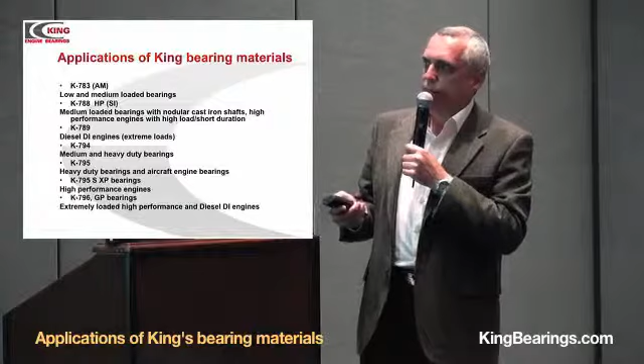Compression ratio: the higher the compression ratio, the higher the pressure, and the higher the load applied to the bearing. Octane number and fuel type: different fuels with different octane numbers allow different levels of compression ratio. For example, methanol has a maximum 16 compression ratio, different from compression ratio 10 - the pressure is high and the load to the bearing is higher.

Displacement per cylinder, engine type - different effects of diesel engine versus gasoline engine. Aspiration type: turbocharged or supercharged engines intake more air, so you can intake more fuel, so the energy discharged in the cylinder is higher and the load applied to the bearing is higher. Bore diameter: the higher the bore diameter, the higher the load, because load is a result of the pressure and the area.

Also, rotation speed of the piston and connecting rod and their weights determine the inertial forces, and so they affect the bearing loading. And bearing dimensions: if you have a large diameter and long bearing, the specific load applied to this bearing is low.

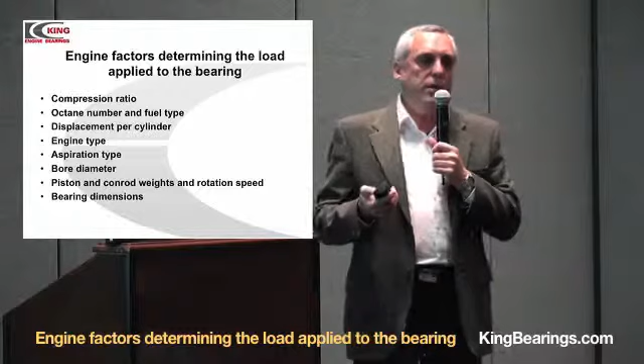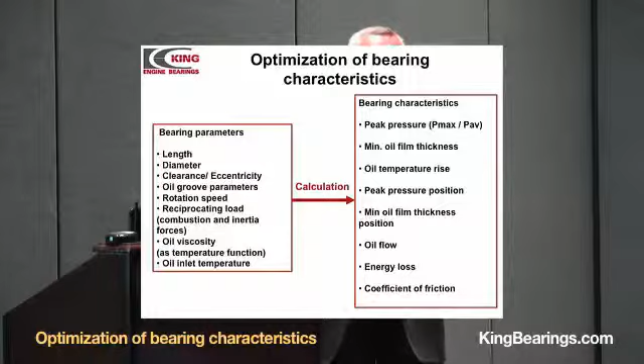We are using our developed software which is able to theoretically calculate the load applied to the bearings. If we have input parameters like this, and engine bearing parameters, we can calculate the combustion pressure, the inertial forces, and the load applied to the bearing. So we can optimize the bearing parameters and select the proper bearing materials using this software.

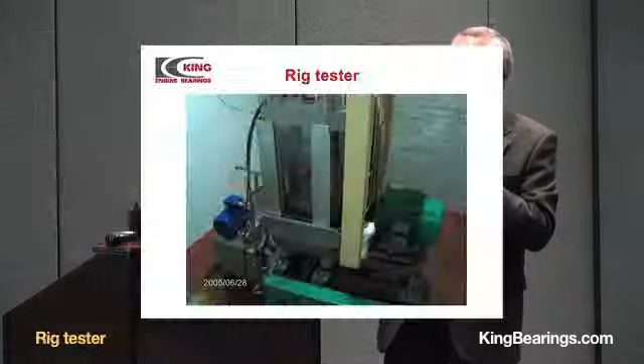This is our test rig machine that we are using for testing our new materials and our currently produced materials. This machine simulates the conditions in real engines. It means cycle loading, but the loading is controlled, so we can predetermine conditions of the test.

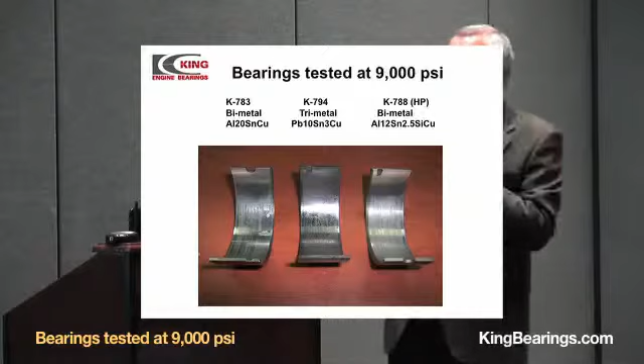These are the results of testing. You see different types of materials. For example, this material shows fatigue on this area. You also see fatigue cracks on the overlay of the trimetal material. And you see this bearing with no fatigue signs.

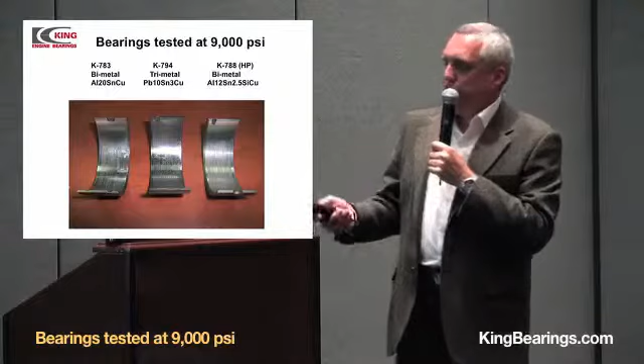This is another example, fatigue on the aluminum surface. And these are two bearings made of high-strength aluminum. They were tested at very high load, but there is no fatigue. This bearing was tested with contaminated oil - you see the particles embedded in the aluminum surface.

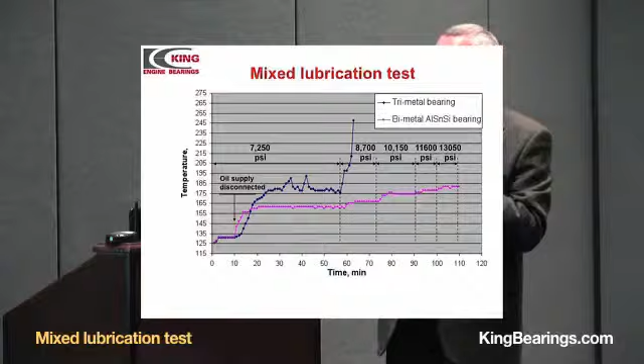This is a very interesting test, also made in this machine, the test rig. Two different materials were tested at mixed lubrication conditions. And you see here the temperature versus time - the temperature of the bearing back.

For example, this material, this is trimetal material. When the oil was disconnected and the regime of mixed lubrication started at this point, the bearing back temperature increases. It stabilized at about 180 Fahrenheit with some peaks which indicate pre-seizure conditions. But when the load was increased, immediately seizure occurs and the bearing was stuck in the machine.

The totally different behavior was with the aluminum silicon bearing, which is our HP bearing. Every increase of load results in a small increase of temperature, but no seizure occurs.

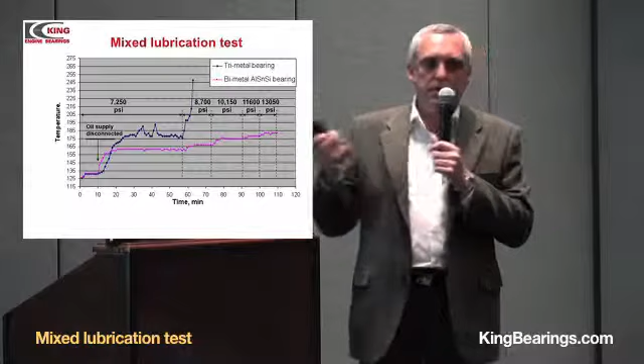This is the effect of silicon particles that I told before. The silicon polishes the surface of the journal and prevents seizure. This is a very interesting effect.

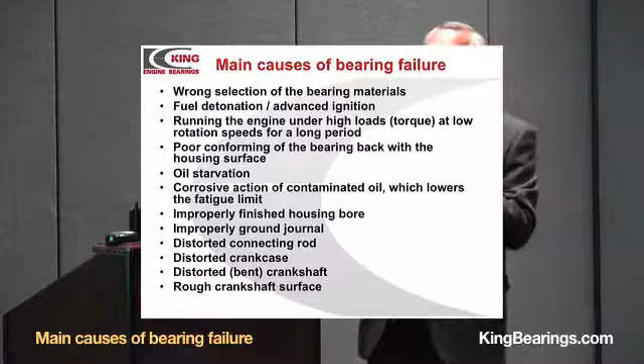Now, the main causes of bearing failure: first, wrong selection of bearing materials, or fuel detonation or advanced ignitions, which causes increased pressure in the cylinder. Running the engine under high loads at low speeds, this is a climbing regime—when the car is climbing, the torque is high and the speed is low. This is a very bad condition for bearing materials because the load is maximum.

Poor conforming of bearing back with housing surface, oil starvation, corrosion, improper finishing of housing bore or improperly ground journal, and different types of geometric defects.

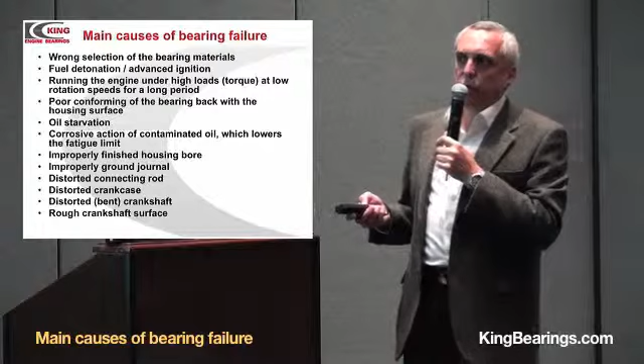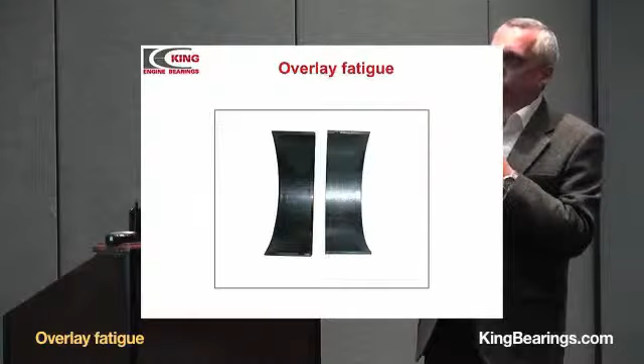These are examples of bearing failures. You see fatigue on the overlay, the small cracks on the overlay. By the way, fatigue of the overlay is not so bad as it's seen. This process is not catastrophic. If there are some cracks on the overlay, the bearing may continue to work, and may continue to work pretty good time. It is different from the fatigue of lining, aluminum lining or copper-based intermediate.

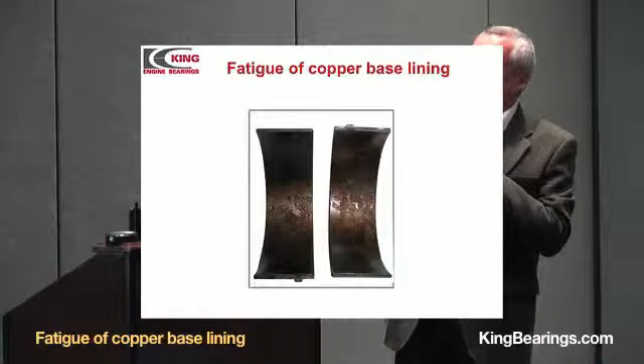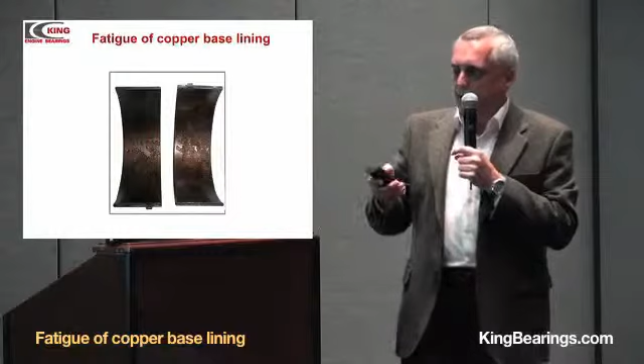If there is fatigue of copper-based like this, it looks like cratering on the surface. You see craters where particles of the copper-based intermediate are delaminated from the surface. It is very bad. It is catastrophic failure.

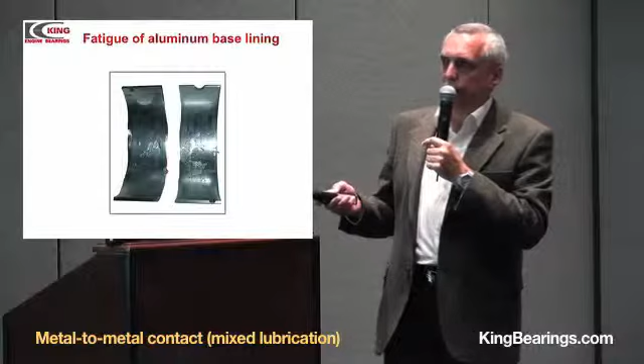Here you can see the metal-to-metal contact, mixed lubrication, or maybe even boundary lubrication. This is the initial stage of boundary lubrication, and this is the final stage. Here, overlay is gone, copper is gone, and steel is burned. So it's a very bad failure.

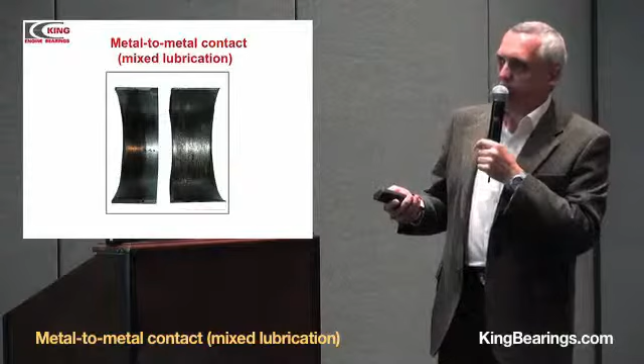The end of a twisted connecting rod, the load applied in a specific area, an edge area, for example, all the load. So because all the load is applied to this area, the specific load is high, and you see here the cracks of fatigue.

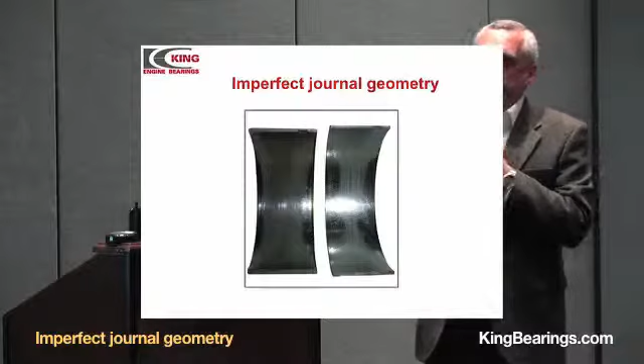And imperfect journal geometry. This case is hourglass grinding of the journal, so you see edge loading from both sides.

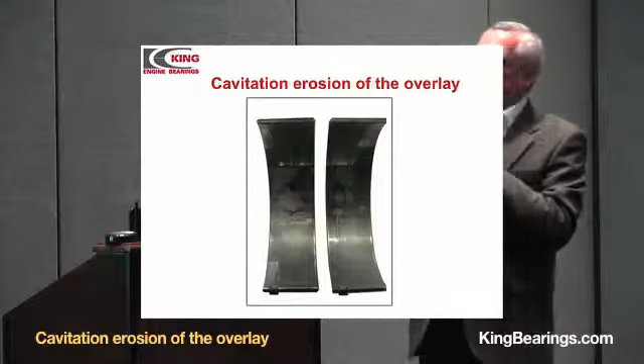And this is cavitation erosion. These areas are eroded—actually, there is no overlay here. It is gone by the erosion resulted from closing up of bubbles forming in the oil, when the pressure changes very sharply.

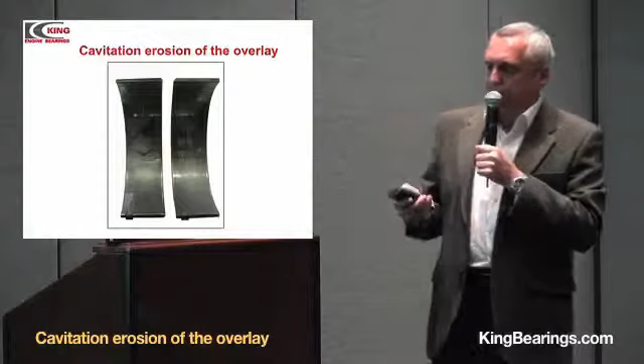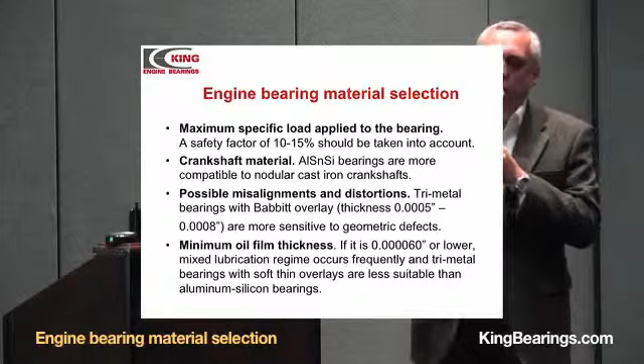Now, the engine bearing material selection. First of all, maximum specific load applied to the bearing. If you don't know it, we can calculate, or other bearing manufacturers may calculate or know the load applied to the bearing. You should take about 10–15% safety factor. The second factor is crankshaft material.

As I said, aluminum tin silicon bearings are more compatible with nodular cast iron crankshafts. They are better than aluminum alloy without silicon. They are better than tri-metal bearings with thin overlay.

Possible misalignments and distortions: if you know that misalignments and distortions, geometrical defects, are large, the materials with thin overlay are not compatible for this application, because the overlay will come out fast, and then the copper intermediate layer is exposed. And as I said, copper has very, very bad compatibility with steel—it welds to steel, so seizure is quite possible.

And the minimum oil film thickness is very low, lower than 60 millionths of an inch. The mixed lubrication regime occurs frequently. It means that if you have tri-metal bearings with thin overlay, there is some risk that the overlay will be removed from the bearing and the copper will be exposed.

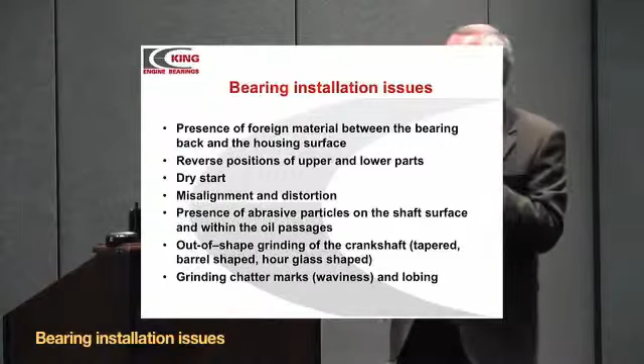The bearing installation issues: it is simple. Presence of foreign materials between the bearing back and the housing is important. Reverse position of upper and lower parts—it is a very common mistake. Dry start—by the way, if you have polymer coating, dry start may work.

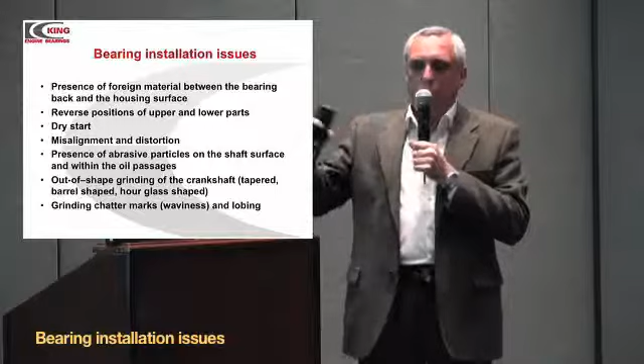Misalignments and distortions, presence of abrasive particles on the shaft surface or within the oil passages—abrasive particles after grinding. Out-of-shape grinding of the crankshaft: taper, barrel-shaped, hourglass. And other grinding defects like chatter marks, waviness on the shafts. I know this defect is not always visible, but it completely breaks the hydrodynamic regime of the bearing, and the bearing doesn't work at all if there are some waves on the journal surface.